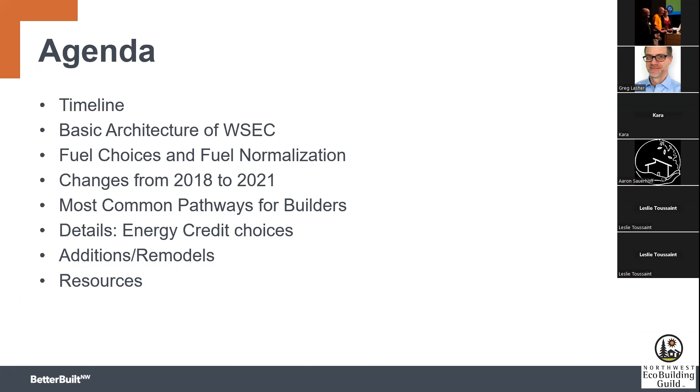All right, here's the news. Today, the 2021 Washington State Energy Code was delayed. There was an 8-2 vote on the State Building Code Council. And they have decided to delay the implementation of the code for 120 days, which is the maximum. I'm understanding that they can delay it. And this is brought about based on the lawsuit stemming from the Berkeley decision in the Ninth Circuit Court. This has to do with the gas ban in Berkeley. I'm not going to get into the legal maneuvers going on here, but basically they are pulling the code and going back to the TAG meetings to hopefully correct some things that will protect the code from future lawsuits.

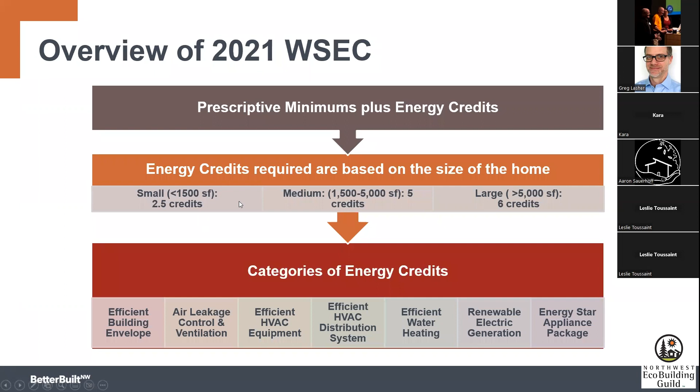Okay, so let's talk a bit more about those size categories and how they've changed from the current code to the 2021. The small, medium, and large are, of course, single family new construction homes. And you see that all of the numbers have dropped. This is part of what is going into this code cycle, which is that the carbon emission credits have been recalculated. More items were pushed into the base code, so they actually have dropped the number of energy credits required.

This is the beginning of my theory that this code cycle, although it's just as big and complex, and in some perspectives, it's actually simpler for builders. As long as a builder follows an all electric path, it's quite simplified. And I'll show you some examples of that as we move through this.

So the other categories here, we have R2 multifamily, that stayed the same. And then we have a lot more definition on additions, which we'll talk more about. They split this category of underneath 1,500 square feet into 2 different sections. And we see some changes from 2018 to 2021. So more on that later.

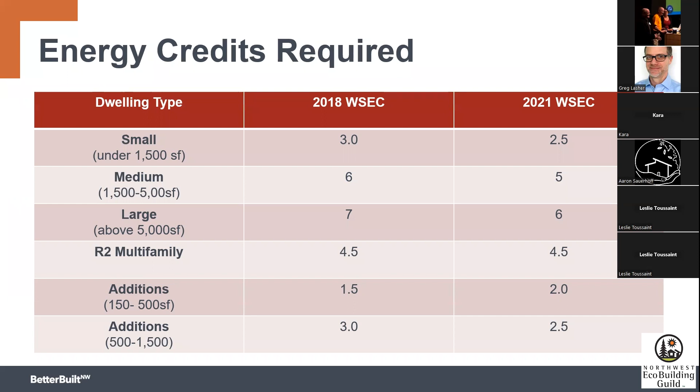Okay, so that's the architecture or the structure of the code. We understand the energy credits and the size requirements, but overarching all of this is fuel choice and fuel normalization. So most energy codes are about saving energy. The Washington State Energy Code is about saving energy, but also reducing carbon.

That is dealt with through the fuel normalization table that was introduced for the first time in the current code cycle, 2018. And they have continued to use that to affect change in the market in this code cycle.

Now I'm going to refer back to some trends on fuel choice. And I think you'll find this pretty interesting. When I did a code study a couple of years ago, we referred to a 2015 code study. And I'm first going to put up what they found.

This is a study done in, I believe, 2016, 2017, and it was on the 2015 code cycle. And what they found was of the new homes in Washington, 79% of them were gas heated. The primary space heat was gas. And then for water heating, a similar but slightly different story, where 61% of the water heating fuel choices were gas, 37% were electric. Also, a lot of that electric was still resistance, not necessarily a whole lot of it was heat pump.

So the 2018 code introduced the fuel normalization table, which requires builders to declare a fuel choice and either penalizes or encourages them with more energy credits. And this was the flip that we saw with the code cycle, that suddenly 88% of the homes in the current code cycle are electric, almost a flip completely of the story there for space heating. And for water heating, 83% of them are electric, and almost all of them are heat pump electric, so very efficient and electric.

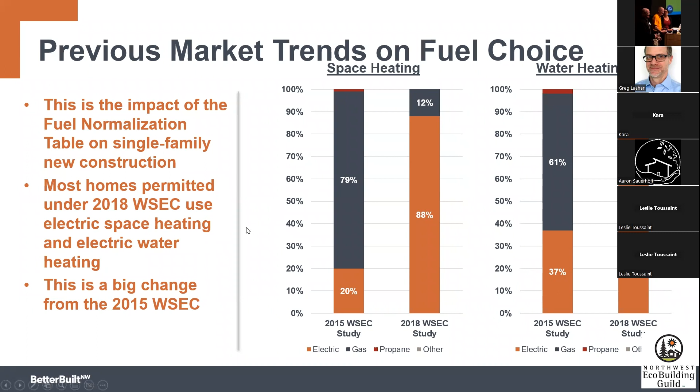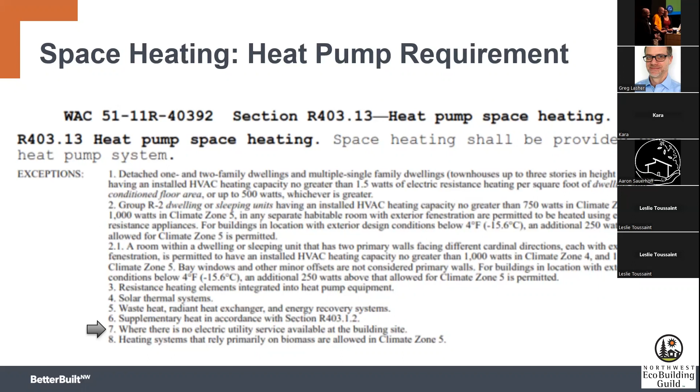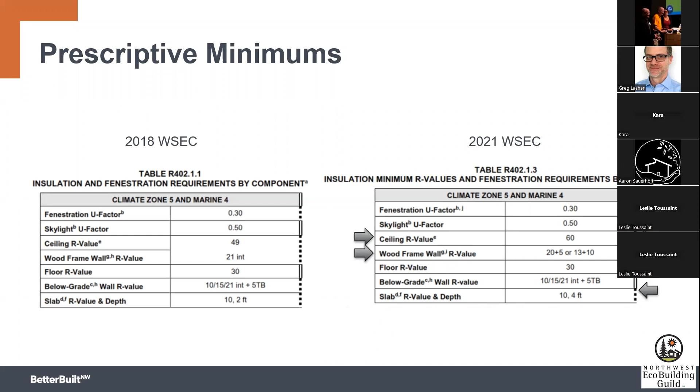The last change here to the base code is the depth of the slab R value moved from 2 feet to 4 feet. That's something to note, but a pretty small change.

Okay, so let's talk about attics. When I was reading the code, this is one of the places where I got a bit stuck, trying to understand what they're after here. King County recently published this on their website, and I found it really helpful, so I just stole it from them for this presentation. And we see 3 scenarios here.

With a traditional standard truss, you would do R60 on the main flats of the open attic, and that would taper down to the edge. If raised heel trusses are provided, then across the whole attic they are requiring R49, which is an increase from R38 in the current code.

The other scenario is you have vaulted ceilings on the upper floor of a home, and that has stayed the same. That cavity needs to be R38 all the way over to the edge. So I felt that was a pretty good way to look at what's going on with attics.

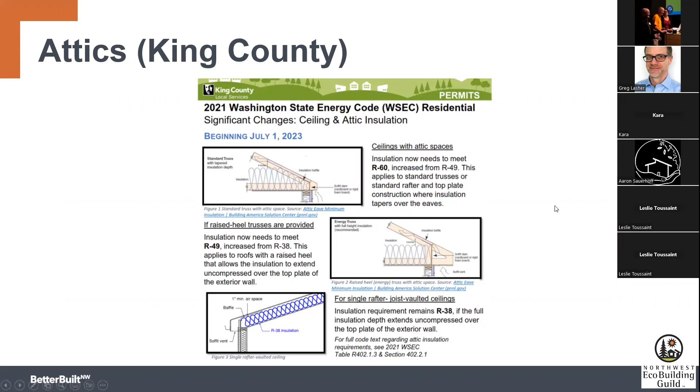Now let's talk a bit more about walls and outsulation. As I mentioned before, there was an optional prescriptive path for energy credits in the current code. Now it's moved into the base code.

This picture here is a builder in Vancouver that I worked with, and he chose that pathway. So I went out and took a couple of photos. This is R5 on the exterior, a very simplistic version of it, nothing super advanced here.

Most builders will choose a product like this, which is a rigid foam board, but it can be other materials, cork, or rock wool, mineral wool. They just need to have a stated R value that's equivalent to the path that you're doing. So if a 2x6 wall, you would need R5 on the exterior.

There is another way to do it though. You can do an alternative calculation. This is one of the things that's not completely finished in the code. We believe the U value calculations are a bit off, but you could do a different choice.

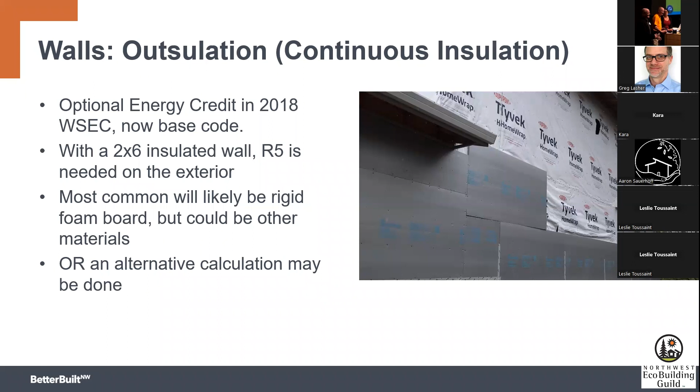If outsulation is just too mind-blowing for you, there are other ways around it. You can hit the same U value by doing, this is just a suggestion, but you could do a staggered stud wall, which would be a higher R value, and you have the thermally broken part of the wall there, and you could combine that with maybe triple pane windows.

There's a lot of affordable triple pane windows on the market now. You could also limit the number of windows in the structure. All of that can be put into a calculator. Our friends at Washington State University Energy Program have a calculator called the C3 that a builder or a rater could be hired to do these calculations for you. And if you can show this similar or better U value than the exterior insulation, you can go that route.

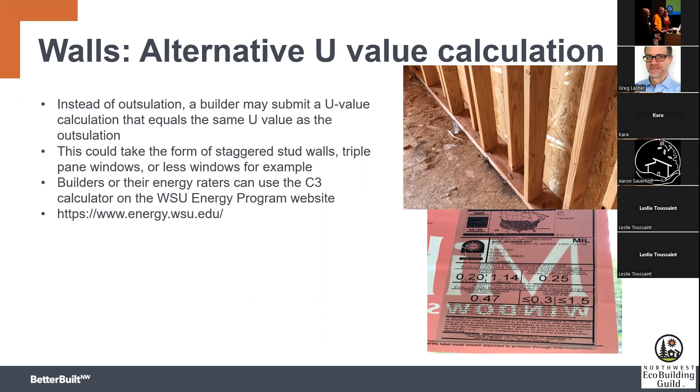Okay, this is kind of a catch-all slide of some other changes. These are just things that I picked up reading the code. There are others. I had a few on here that I wrote down, but then I couldn't find the reference for, so I pulled them off of here. So I have the reference numbers for all these things if you want to check them out.

If you are a building analyst or a rater that does code testing, you would be happy to know that they've dropped the requirement for 8.5-foot ceilings all the way around. It's over to the standard RESNET way to calculate air changes in a home, where you do the actual ceiling height in the current code, or the new code coming.

When a builder is declaring and building a home with all the ducts inside, there are exceptions where you might want to pop a return up through an attic and over to a central hallway. Previously, that was 5% of the ductwork. Now that's limited to a number of linear feet, 10 linear feet of return or 5 of supply. As I work with builders, I see this as a potential issue. A lot of very excellent built homes have a longer return going through an attic than that. This means you need to plan that air handler closet very closely to wherever you want to pop up and go over to a central hallway. You're only going to be limited to 10 linear feet, which is not very far when you're going up into an attic and back down.

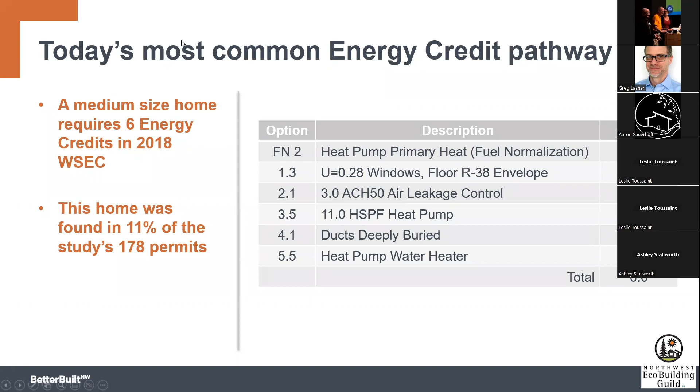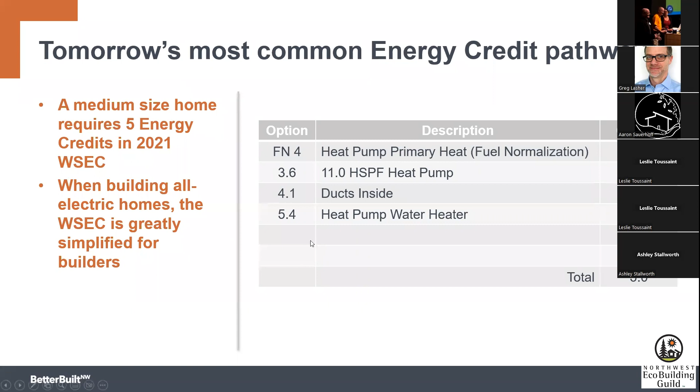Okay, gonna dive into the energy credit choices, and we'll get to the questions a little bit later. I'm not a great multitasker here, so I probably won't be able to monitor the chat. Plenty of time to talk once we get down to it.

So let's go over the fuel normalization table again before we go through each of the 7 categories. Remember, this one is required, so builders have to declare something in here. All of the other options for energy credits are optional, as long as they meet all of the energy credits required by the size. So let's review it again.

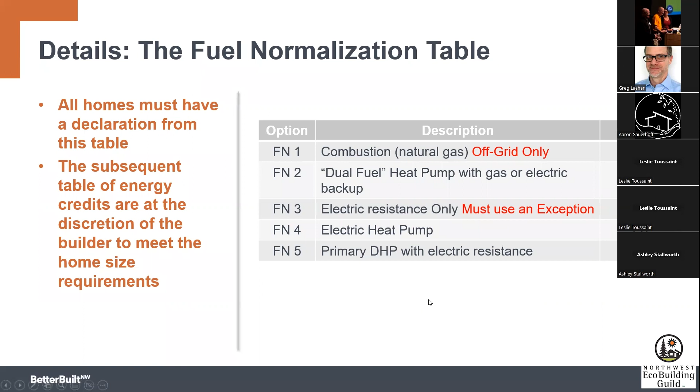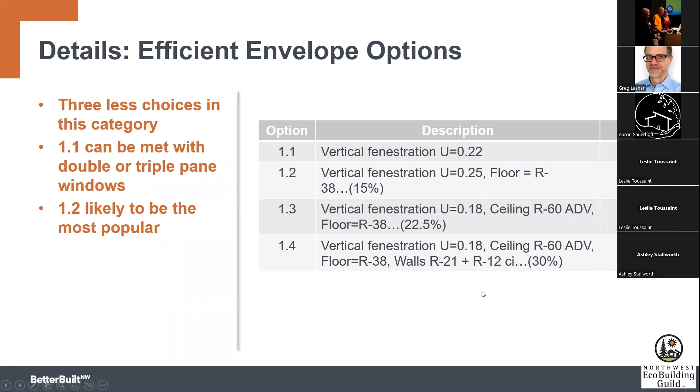Air leakage control: everybody has to do 4 ACH 50, and then you can choose to go beyond that for energy credits if you choose. They stepped up the stringency of this one, because the first air leakage credits you can get are at 2 ACH 50. Also, as you'll notice, all of these options require an HRV or ERV. So if you go for air leakage control, you're putting in an HRV or ERV of various efficiencies. 2 ACH 50 was not a really common pathway for this current code.

I think this is going to be pretty challenging for a lot of production builders. There are a lot of ways to get there, either manually or with the use of AeroBarrier, which is a much more common option out there now. 2 is definitely obtainable—I've seen AeroBarrier get well below 1, but I have not seen them do 0.6 yet. Certainly possible, but almost certainly that's a more advanced builder at the passive house level detailing an exterior air barrier. But these are your options for air leakage control in the new code.

This is the most complex and lengthy category: making your HVAC more efficient. I'll try to review this. There are a lot of details to this, questions you may have on it.

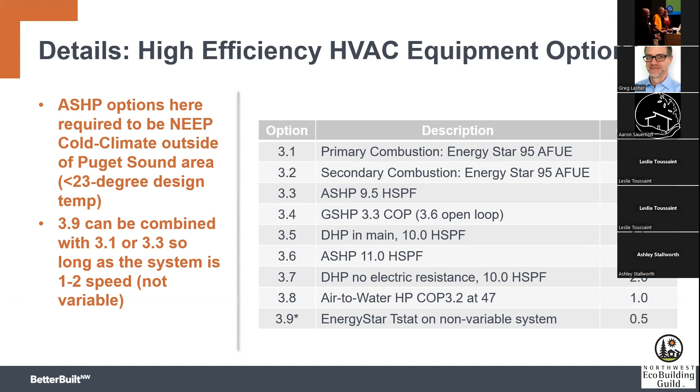You cannot add this to a variable speed system. If you know a little bit about thermostats and heat pumps, they don't play well together and you lose some efficiency because it dumbs down the system. So if you have a 1 or 2 speed system, there are efficiency gains to putting an Energy Star thermostat on it, and they'll give you half a credit to combine with it. But you cannot do that with a variable system.

Now this category is about where the ducts live. In the current code, you could either deeply bury the HVAC system or bring it inside the thermal envelope, otherwise called ducts inside. Deeply buried is no longer available. With the base code being what it is and all the other efficiencies, there's just not enough savings from deeply buried to justify any credits or half credits. Ducts inside only offers a half credit, but again the total number required is less in this code cycle, so only one option here: bring the ducts inside, which is really a design issue more than anything else.

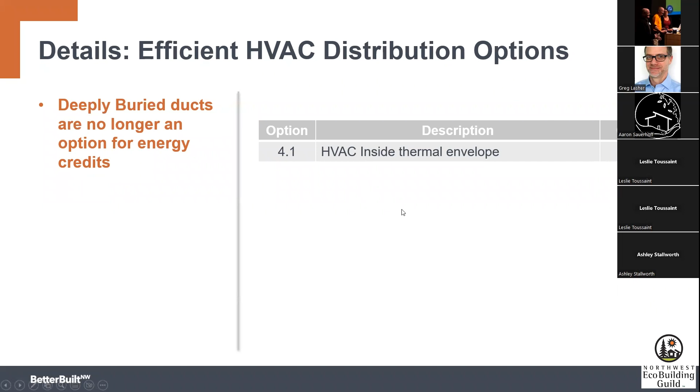Okay, let's go to water heating. There's a few more options available here. Again, 5.4 is there for 2 credits - that's a heat pump water heater, tier 3 NEEA list. You'd be hard pressed to find any other tiers on the market anymore. Tier 3 has been around for quite a while and they're highly functional.

Let's go to 5.3, and you can now supplement with some solar passive water heating - I'll call that preheating, which is typically how those systems work. You can get half a credit for that.

Then let's do 5.5 here. So a split system where the compressor is outside with a UEF of at least 2.9, you can get 2.5 credits. That's also similar to the current code cycle.

So our 5.1 and 5.2 are drain water heat recovery, which has been around for I guess 3 cycles, but those can be combined with another option in this category. Compact water distribution is a new option here - it will get you half a credit, and this is a design problem really more than anything else. It's fairly stringent - I'm reading that you can only have 16 ounces between the lines, and that is a measured thing in order to get that credit. So look into the details of that if you're interested.

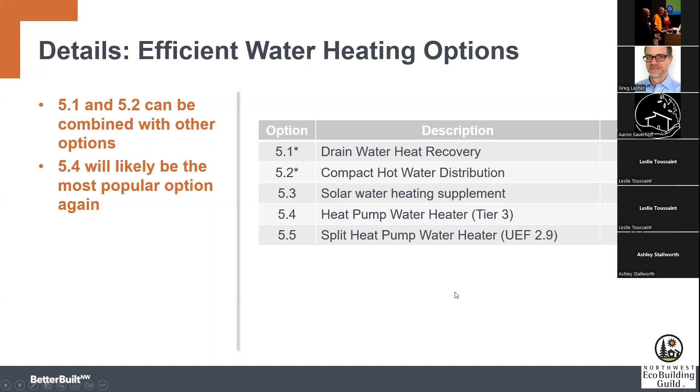Particularly on smaller units, this seems very possible as long as you're designing for comfort and efficiency.

Renewable energy options are moderately popular in the current code, and they're sort of doubling down on this. The calculation is no different, but what they've done here is allow half credits instead of just full credit accumulation. I understand some jurisdictions were allowing that anyway, so they acknowledge that - you can do this in half credit increments of 600 kilowatt-hours of electric generation, and they raise the maximum from 3 energy credits in this category to 4.5. So a good size array can get you 4.5 credits - that's a pretty big option if you're going that route with your homes.

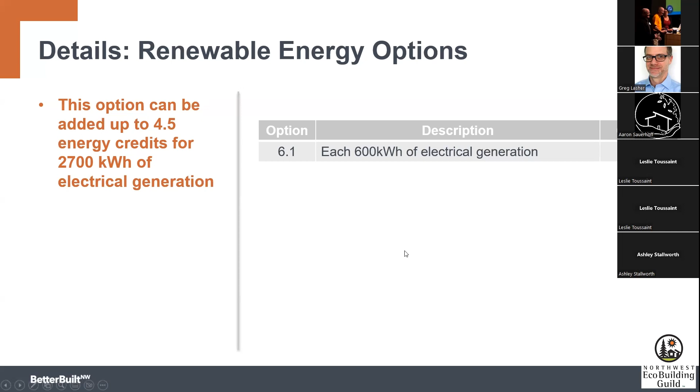So this is the last category, category 7, and it's about efficient appliances. Initially this looked promising, like it might be more popular, but in the end this needs a bit of interpretation. The bugaboo here has always been the heat pump ventless dryer - they are awesome, but most people do not prefer them. So there wasn't a lot of usage of this category because of that, and we believe it is still required in the current code. That's kind of our reading between the lines. It would be nice to have that clarified, but we believe a ventless dryer is still required, and you get half a credit if you do all 4 of those.

Okay, switching gears a little bit here - that's all of our energy credit categories. I'm going to talk about additions and remodels. This is a bit new to me, and I know there was a question ahead of time asking me to address this, so here we go.

These are some changes - some of these may be restatements, but most of this is changes to how they handle additions. So small additions under 150 square feet require no energy credits, just the base code needs to be complied with. So if you do a 150 square foot addition, which is about the size of the room I'm in here, it's like 12.5 by 12.5, right?

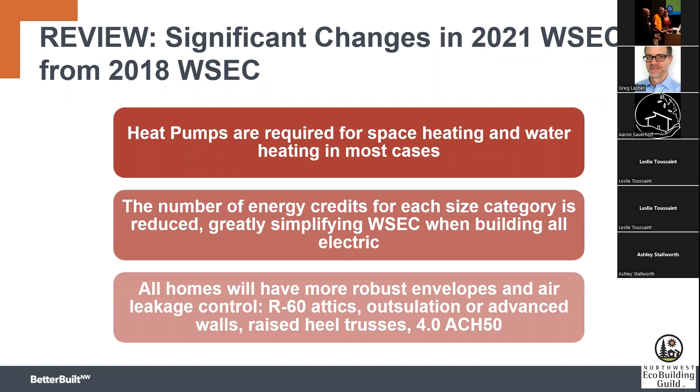I'm going to repeat that air leakage control category. They start at 2 ACH 50. 3 was very popular in the current code, and that's no longer a possibility. There's a lot of difference between 3 ACH 50 and 2 as far as how a home is built. And then all the air leakage control options require an HRV or ERV. That 8.5 foot ceiling rule has been repealed. Deeply buried ducts are no longer an option for energy credits. They are an option for just installing ductwork, but you will no longer get a half energy credit for it.

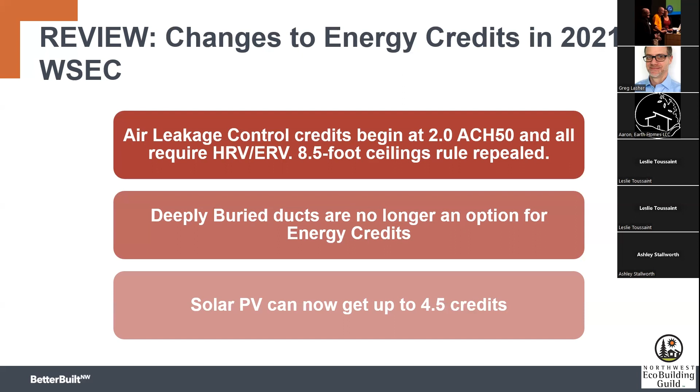And solar PV can now get up to 4.5 credits. This is a list of some of the significant new energy credits. Compact water distribution, look into that. Washington State University Energy Program has some resources for that, go to their website - I'll show you in resources in just a second - but they've got some great calculations for that. Smart thermostats are new, but only for non-variable speed heat pumps. And then dual fuel systems is an option in the fuel normalization table. Electric heat pump as primary, and efficient combustion fuel furnace as a backup, is probably the most common pathway.

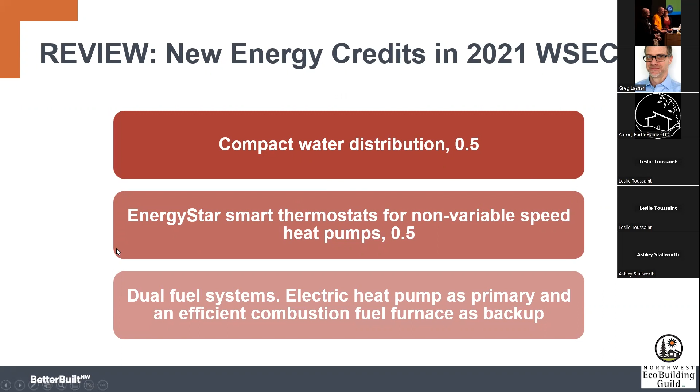Big shout out to my buddy Jonathan, who I think is maybe on the call tonight.

He and his team are great at answering the detailed questions. I've been known to call these numbers myself. Also, they do great lunch and learns and code webinars. So those are all available through the WSU Energy Program site. And that takes me to the final slide here.

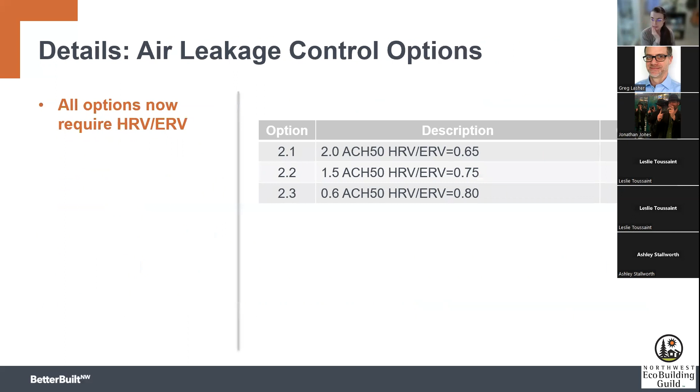Emailed to me, I had a couple questions from our membership I wanted to touch on. Aaron Sauerhoff, one of our board members, please feel free to chime in if I'm missing anything. He posted a question via email this morning: is there interest in including high performance natural builders building beyond passive house standards, where a heat pump is not even necessary? Would that be included in future codes? Sometimes the only option is to select an alternative heating system, which provides negative points. Is there a pathway through energy modeling where they can select no heating system required? And where does the case of advanced masonry heating or small wood stoves come in as an extremely efficient or clean way to heat the entire building when run only occasionally? He also asked, is code super anti-wood fuel, even when it can be cleanly burned? Aaron, if you're still on, feel free to chime in if I got all your points.

Yeah, I'll start off, and then Jonathan, I'd love to know your thoughts on this. But a passive house or something close to it is going to have so many efficiencies beyond what we've discussed here tonight, that I think the UA calculator is going to be your friend, and there's a tremendous amount of energy credits that can probably be obtained through that.

As far as the fuel normalization choice, that's a great question. I've pondered that as well. I don't get to work with passive house builders every day, so I haven't had that question directly before. But I would assume wood fired or wood heated would fall under combustion heating, but Jonathan, can you speak to that?

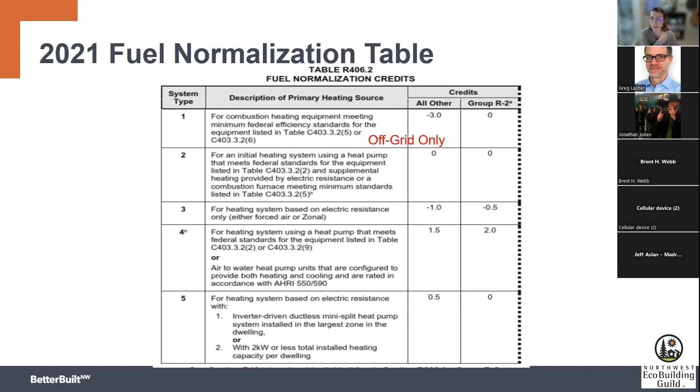Santos asked, the verbiage looks slightly different on the 7.1 credit, ventless dryers for 2021. When a builder has all Energy Star appliances, they want to pursue this credit, however the hold up is the ventless dryer. The verbiage is different here for a dryer. If the dryer can vent against the exhaust with no ducting, can this credit be achieved?

This is the part that we're kind of in need of an interpretation. Jonathan and I have gone back and forth about this and brought some other folks in. In the end, it doesn't look like there's a way around the ventless heat pump dryer, but this is where we need an official interpretation. This might also be an instance where, if they don't clarify this in the final printing, this is a question I would ask the local jurisdiction office before I planned my permit submission. What it says for the dryer is look it up on the list of, I believe it's the 2022 Energy Star list of dryers. When you go there, the heat pump dryer seems to be the one that will comply with this. That's my reading of it. Jonathan, do you have anything different to say?

So funny enough, I was scrolling as you were talking about it to make sure that the newest edition still had the same language in it, and it does. It says the dryer ducts and exterior dryer vent caps are not permitted to be installed in the dwelling unit. So the very last sentence in 7.1 on the chart of the 406.3 says the dryer duct has to be removed.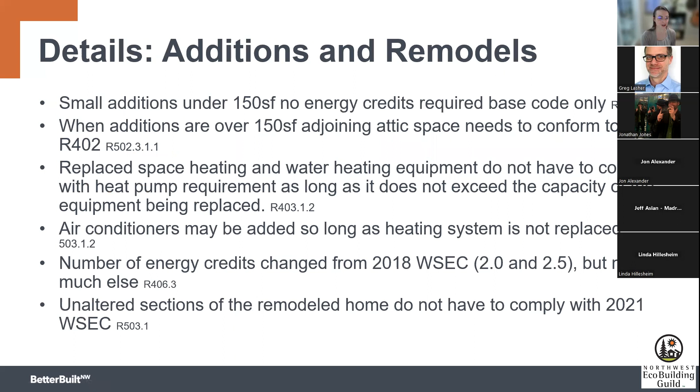Let me see if there's any more. Ashley asked, is there a portal to compare and contrast building codes by state, for example Washington versus Oregon? Has TRC done anything like this, Greg? That would be really helpful for you. Just curious.

Not that I'm aware of. I don't know, I would probably spend too much time there if there was a portal like that to compare. I think we tend to focus on the local states, and we're pretty much unaware otherwise. Mostly my exposure to other state codes is when I go to national conferences and hear what other states are experiencing. There are several states that don't have state codes. Even Colorado does not have a state code, they have what's called home rule. That doesn't mean they don't have good codes, but they're all local. So it's kind of interesting, the mixture of responses from the states as to what they adopt.